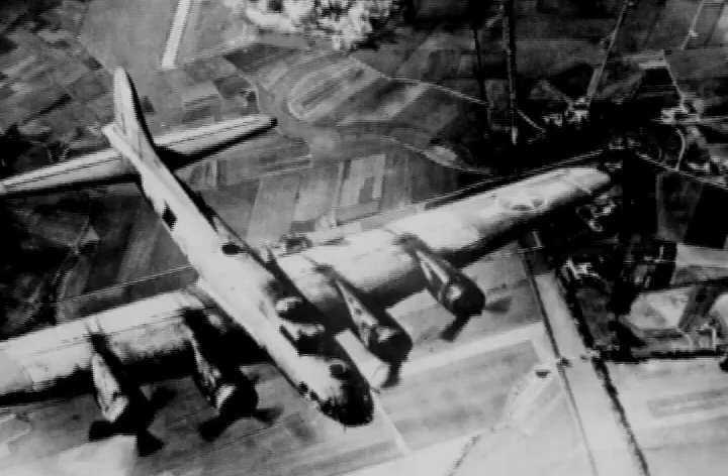The year was 1944. On battlefields throughout Europe and across the Pacific, the most monumental struggle in human history was being waged. It was a year in which the long-awaited Allied landing in Normandy signaled the beginning of the end of World War II. Arrayed against such a backdrop, most events tend to pale in significance.

And yet, it is exactly in this historic context, 60 years ago, that the PM industry experienced a momentous beginning of its own, an event whose significance has grown with each passing year. In 1944, the PM industry's major product was self-lubricating bronze bearings, and non-ferrous metal powders were its principal raw materials. Shipments of U.S.-made iron powder amounted to only about 1,800 tons that year.

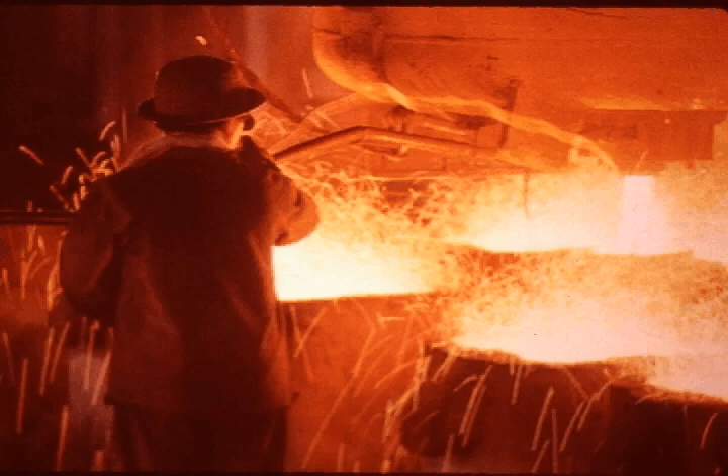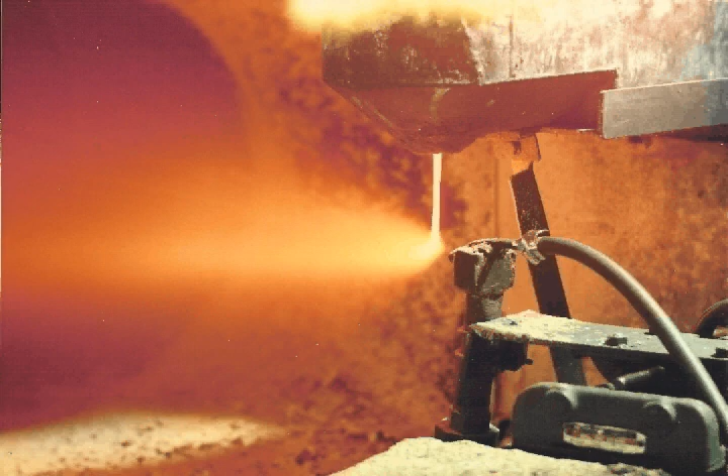Many aspects of PM were considered secret back then, and industry practitioners were loath to discuss too many technical details for fear the competition would learn about their special techniques. Still, the industry, mostly through the impetus of the powder producers, recognized the need to organize itself, and in January of 1944 formed a trade association which was called the Metal Powder Association.

The administration of the association was left to the Lead Industries Association, which was paid by the powder producers to run the MPA. The MPA's first meeting, at New York's Waldorf Astoria Hotel in May 1944, included a review of the organization of the association by its first president, H.E. Hall, president of Metals Disintegrating Corporation of Elizabeth, New Jersey, and the presentation of 5 technical papers.

The descendant of Metals Disintegrating, ACuPowder International LLC, is involved in the PM industry to this very day, as are those of many other early members of the MPA. Companies like General Aniline and Film Corporation, or GAF in New York, today doing business as International Specialty Products. New Jersey Zinc Sales Company in New York, today active as Zinc Corporation of America. And the Plastic Metals Division of the National Radiator Company in Johnstown, Pennsylvania, which still produces powder as North American Höganäs High Alloys LLC.

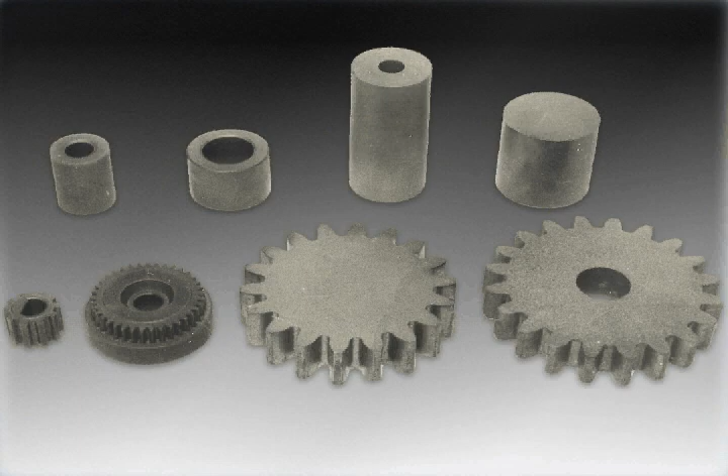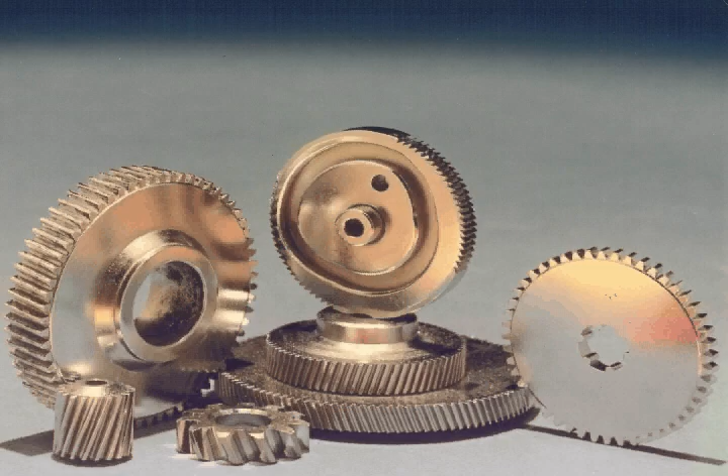By 1945, the association amended its bylaws in order to open membership to companies engaged in the manufacture of, quote, useful articles, end quote, from metal powders. An associate membership was also created, which allowed manufacturers of equipment used to make powders and parts, as well as consultants, to become members.

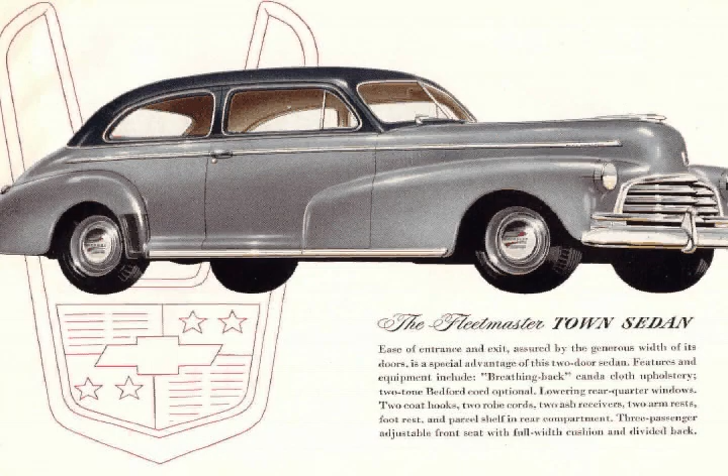As the 40s progressed, PM's major markets included business machines, home appliances, and of course, automotive, with the Amplex division of Chrysler Corporation in Detroit and GM's Moraine Products division in Dayton the dominant players in the industry. Early on, MPA launched an active program aimed at standardizing powder evaluation methods such as apparent density, flow, screen analysis, and hydrogen loss.

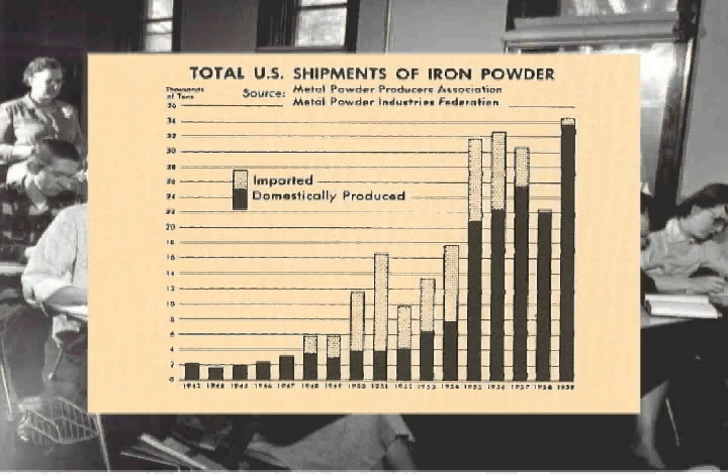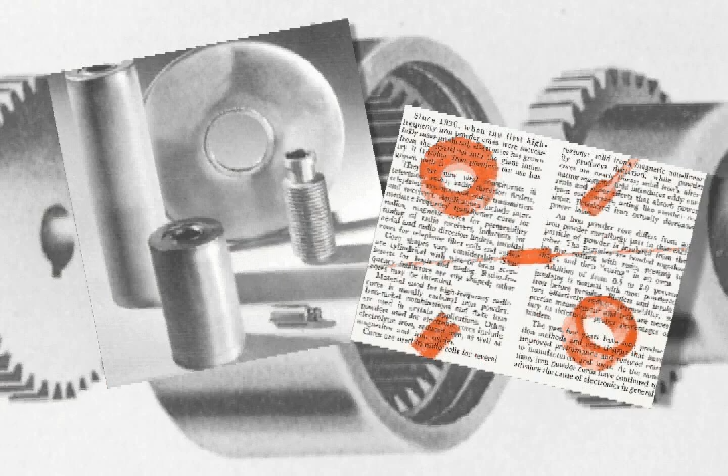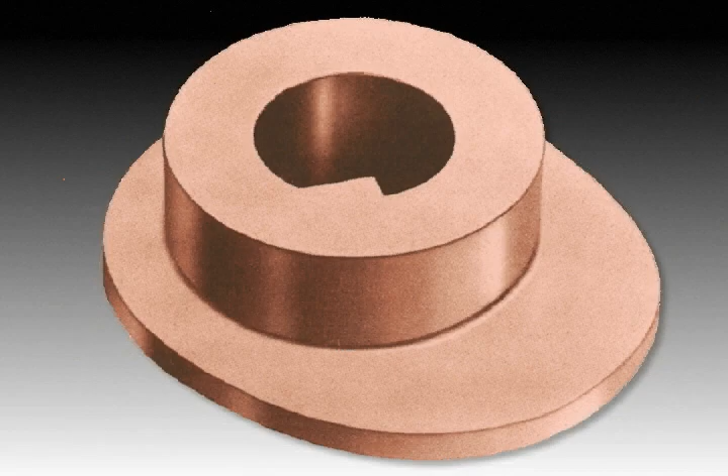As the 40s gave way to the 50s, PM applications started to broaden, and the iron markets began to take off. In addition to self-lubricating bearings, the automotive oil pump gear became a viable product. Filters, radio cores, copper carbon brushes, contact points, and tungsten filaments were the other commercial products for PM. Large, well-known companies such as NCR, Maytag, Remington Arms, Pitney Bowes, IBM, and Lionel Corporation began designing PM parts for their products or installing in-plant PM departments.

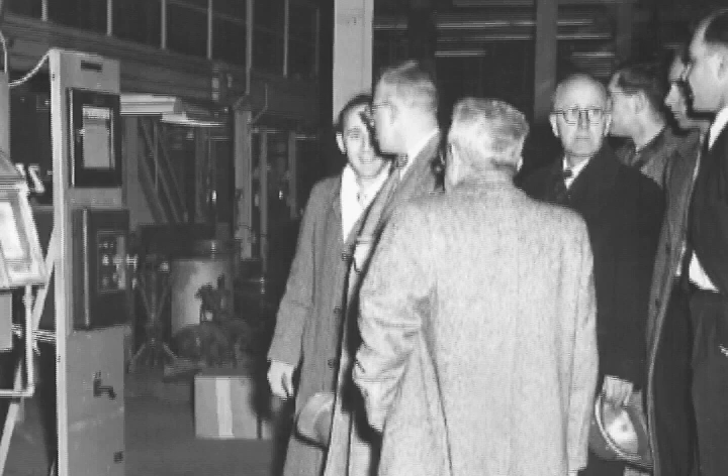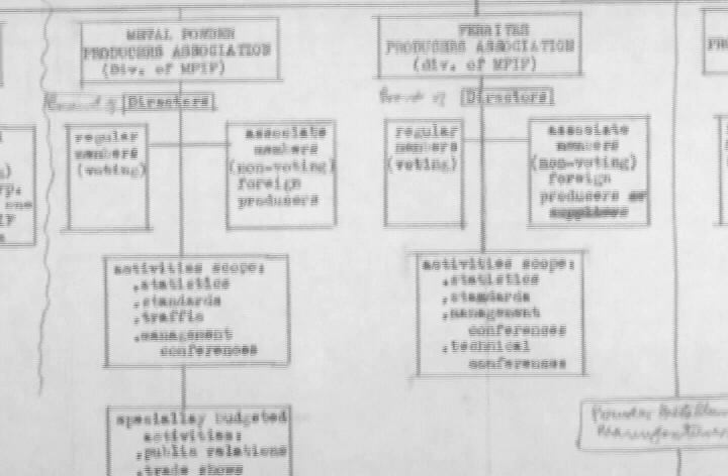In 1956, Kempton H. Roll, who had first become involved with the metal powder industry in 1948 when he came to work for the Lead Industries Association, was asked to serve as the association's first executive director. Together with industry leaders such as B.T. Ernie DuPont of National Radiator, Ernest Klein of New Jersey Zinc, and George Roberts of Vanadium Alloy Steel Company, Kempton Roll developed the initial structure of the newly named Metal Powder Industries Federation, which was to be made up of separate associations covering different sectors of the PM industry. The Federation was officially constituted in 1957 with George Roberts as its first president.

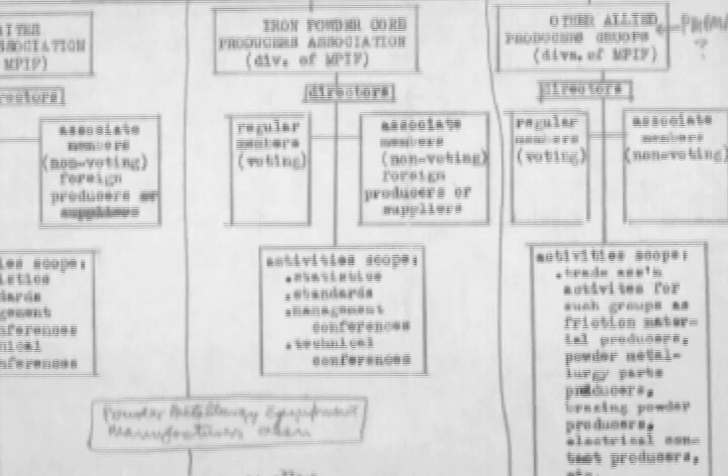Soon after, the Powder Metallurgy Parts Association, Metal Powder Producers Association, Powder Metallurgy Equipment Association, and In-Plant Powder Metallurgy Association, later to become the Advanced Particulate Materials Association, were formed and integrated into the Federation concept. In later years, the Refractory Metals Association and the Metal Injection Molding Association were also launched and brought under the Federation's umbrella.

In conjunction with MPIF's creation, industry leaders saw the need for a professional society to promote the advancement of powder metallurgy as a science. Thus, in 1959, it formed the American Powder Metallurgy Institute. APMI has gone on to become recognized as the international professional society of the industry, with local sections, a monthly online newsletter, and the respected International Journal of Powder Metallurgy, first published in 1965.

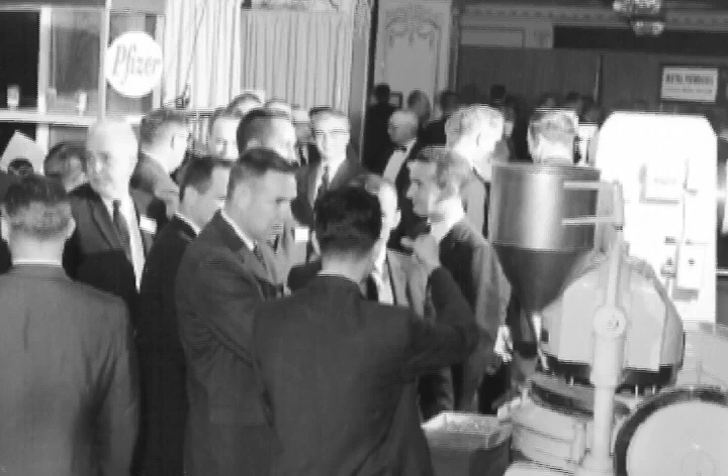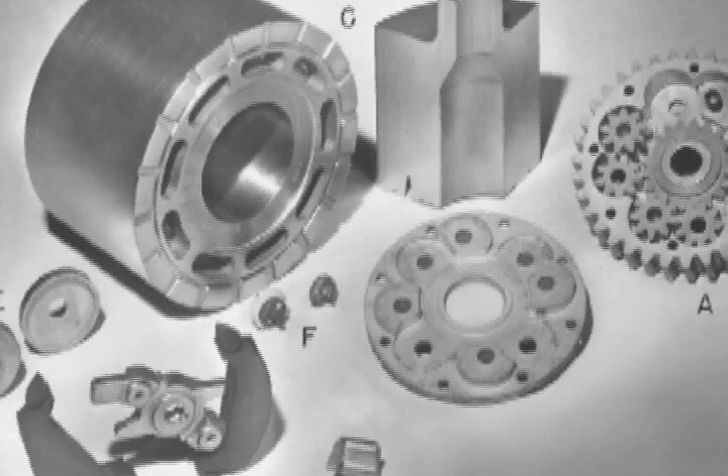To reflect the growing stature of the industry, as well as the wider scope of the association, MPIF sponsored the first International PM Conference in 1960, an important worldwide industry forum which now alternates every 2 years among North America, Europe, and Japan. Other milestones continued to be posted. To showcase its increasingly diverse range of applications, in 1965, MPIF introduced its PM Design Competition, which featured these interesting and unique winning entries. In 1966, Ford Motor Company pushed the technology by introducing the C6 automatic transmission, the first to use substantial numbers of PM parts.

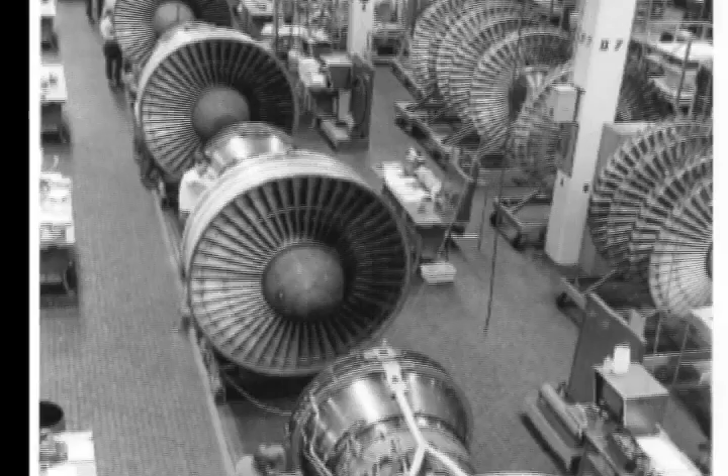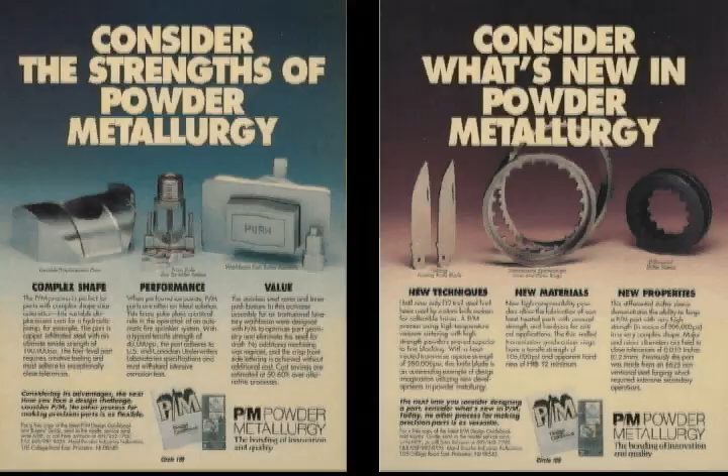During the 60s and 70s, the PM industry established itself as a viable technology capable of technological breakthroughs such as PM superalloys for aircraft applications and PM forgings for the automotive industry. In 1968, to deal with industry technological matters, MPIF formed the Research Advisory Board, which later became the Technical Board. In 1981, the Industry Development Board was formed and was charged with developing a cohesive, cooperative, industry-wide marketing program.

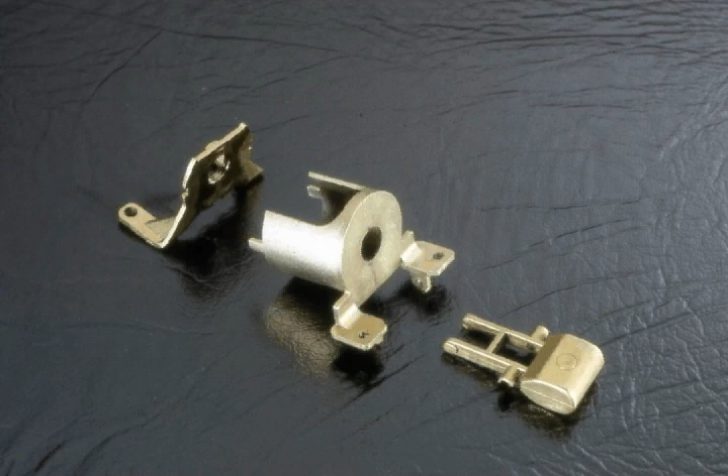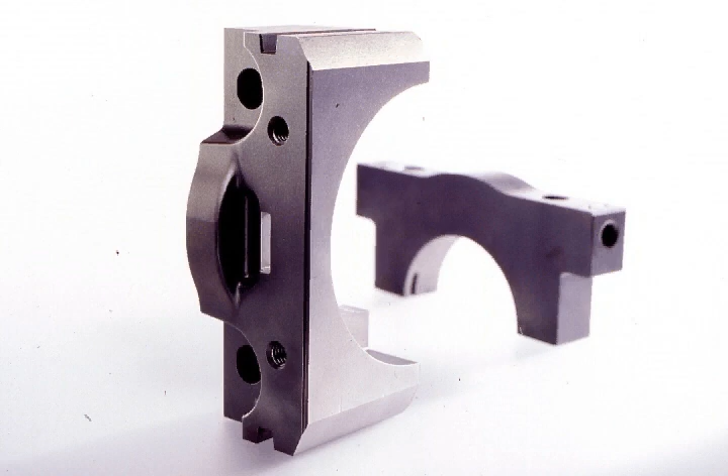The 1980s were fruitful years for rapid solidification technology, PM tool steels, and the beginning of metal injection molding. Other landmarks include Ford's first domestically produced PM steel hot forged connecting rod in 1987, as well as GM's adoption of PM bearing caps in 1993. All the while, PM usage in the typical family car has continued to grow, with current levels being nearly 3 times what they were in 1977.

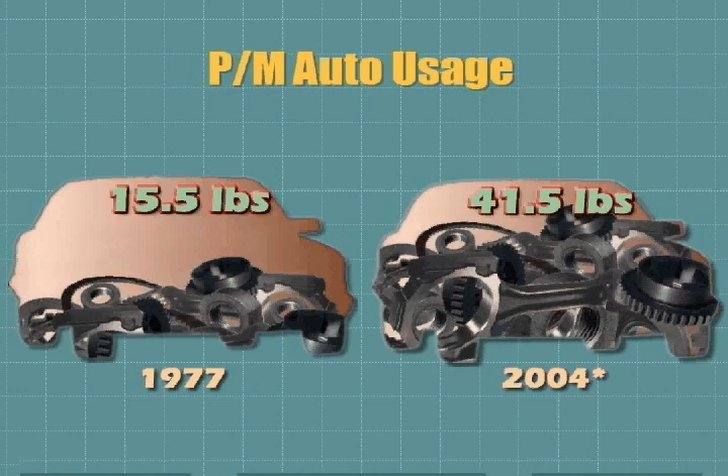Throughout its existence, MPIF has played a pivotal role in the growth and success of the industry, fostering a free exchange of technical and business information through courses, seminars, and international conferences and exhibits, along with becoming the premier publishing house for PM publications and technical literature. It has been the prime mover in spreading the word about PM's benefits and capabilities internationally.

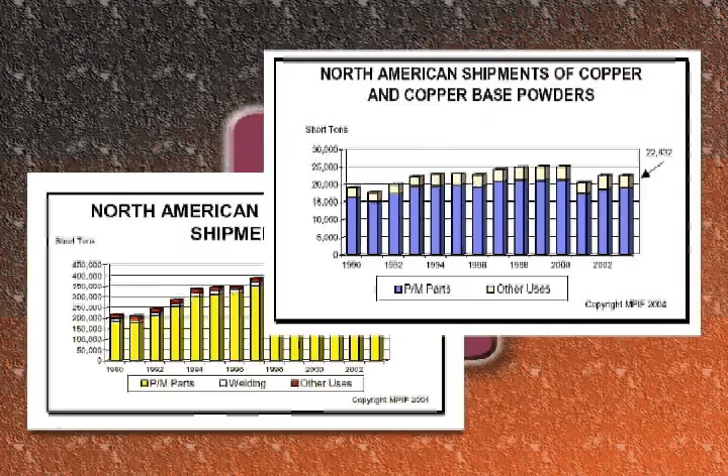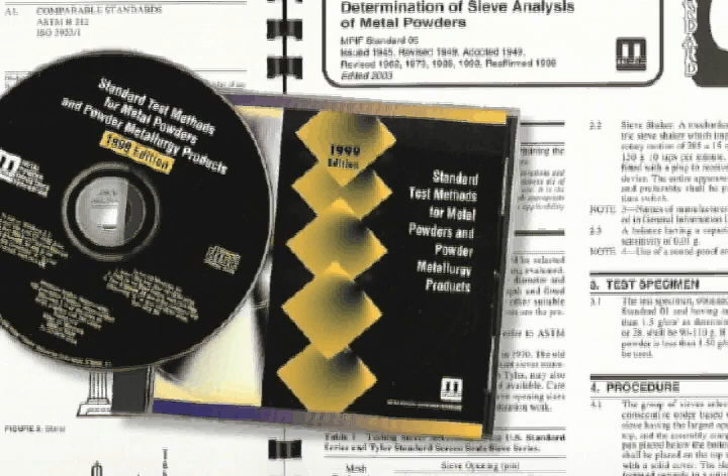MPIF associations have provided valuable statistical information to industry companies, helping them evaluate market size and growth and plan for investment in the future. In addition, MPIF has been a strong supporter of industry standards, seeking to raise the level of quality through powder and parts testing standards, and helping PM parts buyers make better informed decisions through the Information and Materials Standard 35.

MPIF has grown to more than 275 member companies and organizations. Its role as the leading trade association for the international PM industry is unquestioned. The Federation has initiated innovative programs for R&D and standards to advance the growth of the PM industry. The MPIF Standards Board was established in 2001 to improve the coordination of standards and speed up the approval and introduction of new standards.

MPIF is also leading the cooperative worldwide initiative for the creation of a new global PM property database, one of its most ambitious projects ever, and one that will represent a quantum leap in the delivery of vital engineering information to the end-user community.

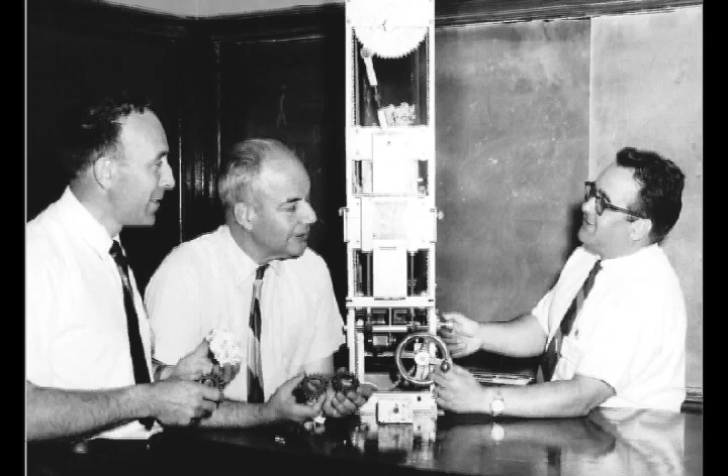Most of all, through its 6 decades of existence, MPIF has been a gathering place for a diverse band of technical and business visionaries and geniuses who have helped make this industry what it is today. They did things others said were impossible. Some were genuine rebels and characters with rough edges. Others were schooled at the finest universities.

Yet, they all shared an enduring vision to develop powder metallurgy into an important, internationally recognized and growing industry and technology. It is their efforts we celebrate as we proudly mark the 60th anniversary of the association they have all nurtured, the Metal Powder Industries Federation.